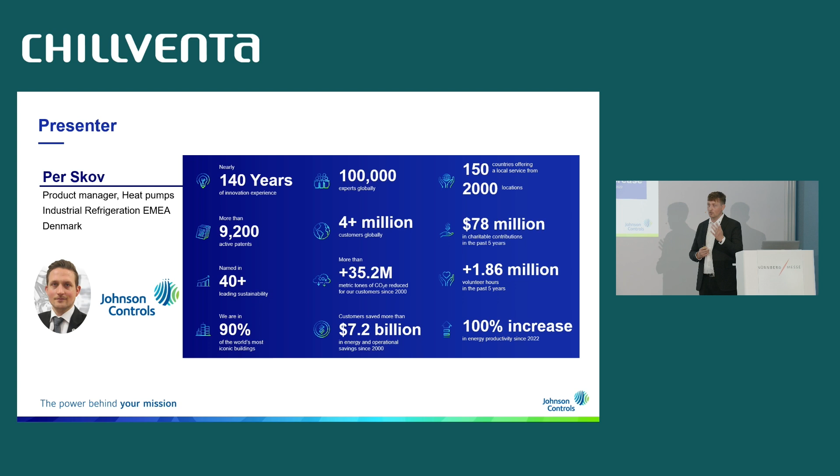What I'm going to talk about is high temperature heat pumps. To clarify from the beginning, when I say high temperature heat pump, I mean a heat pump supplying higher than 100 degrees. As we heard prior, there's different solutions for that. We're going to cover that in this presentation, but also a really relevant topic: the point of high source temperature.

We see a lot of the projects we have sold with high temperature heat pumps are actually being realized due to the fact that they utilize a high source temperature available in the process, which makes the solution far more competitive.

Some of the market trends, just to start out, quickly also addressed in the prior presentation: electrification, cleaning up the energy we use, increasing efficiency, and turning energy into smart systems. Heat pumps actually feed into all of these.

Starting with the first one, the big one, electrification, which has been stated to be critical for us to reach our target of CO2 emission reductions. In general, electrification covers replacing technologies or processes that require fossil fuels with electrical solutions instead.

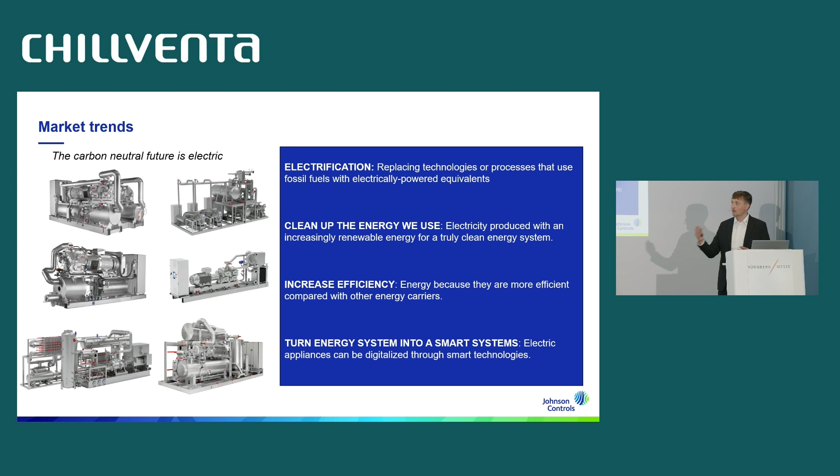This could be both car to electrical car, but for this case also fossil fuel boilers replaced by heat pumps or electrical driven boilers. But with regards to electrical boilers and heat pumps, it's important to look at the increase of efficiency. Heat pumps have the COP factor, so significantly higher efficiency than an electrical boiler, and thereby, with many operating hours, they are superior on the total cost of ownership.

Moving into that and talking also about excess heat — I like to talk a lot about excess heat because it's fantastic together with heat pumps. I like to state it's the world's largest untapped source of energy. Of course, putting in a question mark because I cannot qualify it, but we do have waste heat available everywhere.

The matter of fact is that in Europe, we actually have more waste heat available than we have heating demand for buildings. The difficult part is often that the waste heat is available either at a different temperature or a different location than the actual heating demand, but that's where heat pumps fit in perfectly.

Here's a similar example as we just saw in the prior presentation. At the top, this is a fossil fuel driven process. To the left, we have 110% input to account for a boiler efficiency of 90%, and then we get 100% process heat. For this example, we have 100% waste heat then from the process.

One could argue that many processes are optimized to lower the waste heat, but for the comparison here we use 100% waste heat. Then if we look at a heat pump driven process below, we recapture some of the waste heat — for this case 75% — that's put into the evaporator of the heat pump, kept inside the system. By doing that, we can significantly lower the energy input into the system, from 110% down to 25%, thereby lowering the overall energy consumption.

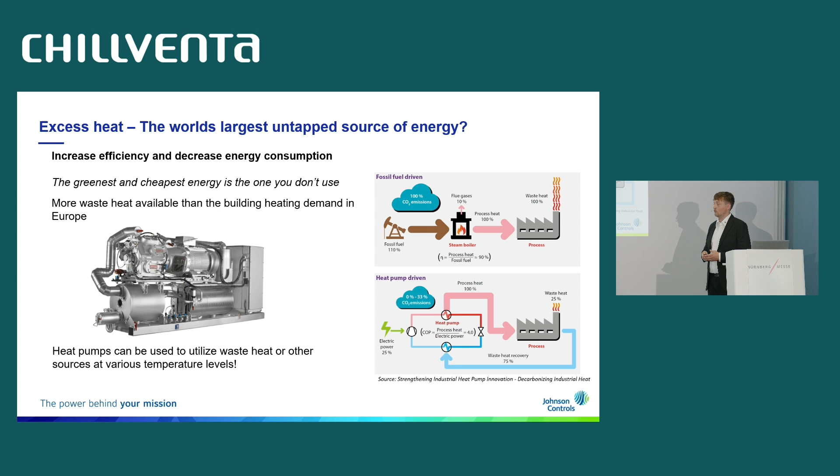So in general, heat pumps can utilize waste heat available at many different temperatures and boost it to higher temperatures that can be utilized both inside an internal process or for district heating.

To go one step further, I made this mapping with different industries, examples of processes, and approximate temperature range. To the left, we have excess heat. To the right, we have heat demand. And for nearly every process, there is excess heat, heat loss, or waste heat — many names. If we look at the industries, we have breweries, dairies, paper, bricks, starch, chemicals, sugar, and various different processes.

The approximate temperature range mapped out here ranges all the way from 20 degrees up to 120 degrees. A lot of these processes are being utilized already, especially in the brewery and dairy sector. We supply a lot of ammonia heat pumps for this, also because the heat demand in general is in the lower range compared to some of the other processes.

But then if we look further down on both brewery and dairy, but also other industries, there is a significantly higher temperature requirement in those processes. The interesting part is that these in general have higher waste heat available too. So if you look at the temperature lift across these, it's actually fairly similar across the process. Of course, this is where heat pumps fit in perfectly.

They can utilize this source or waste heat temperature that's available and then supply the high temperature. So of course, one important thing is to be able to supply the high temperature. The other important part is to be capable of utilizing the high source temperature. And that's a problem we have addressed with this new product, where we can utilize sources all the way up to 90 degrees.

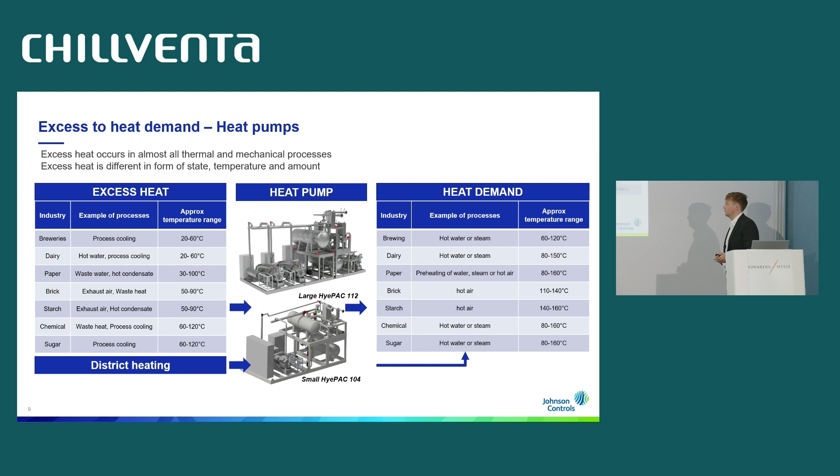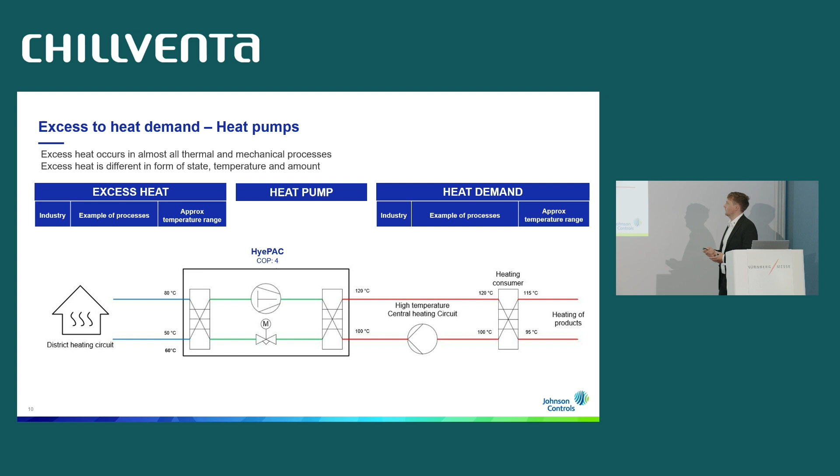It could also be turned the opposite way around. If there's no excess heat available, you could also use the district heating as a source for the heat pump and then supply into the process itself. So as a general example, district heating in at 80 degrees, out in the range of 50 to 60 degrees, and then supplying heating from 100 to 120 degrees.

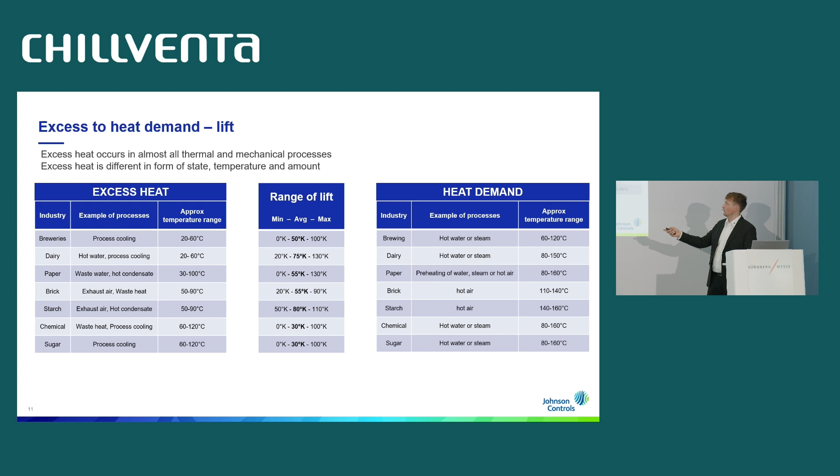The interesting part, as I mentioned, is of course the lift. My focus on lift is because in general it defines the COP that can be achieved, so the efficiency. If you look at the approximate temperature range for excess heat and heat demand, then we have an average temperature lift ranging from 30 degrees to approximately 80 degrees. The lower the lift, in general, the higher COP can be achieved by a heat pump.

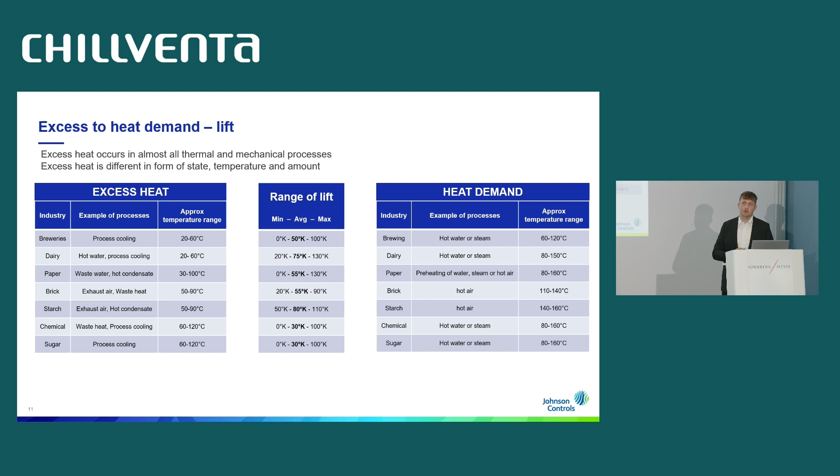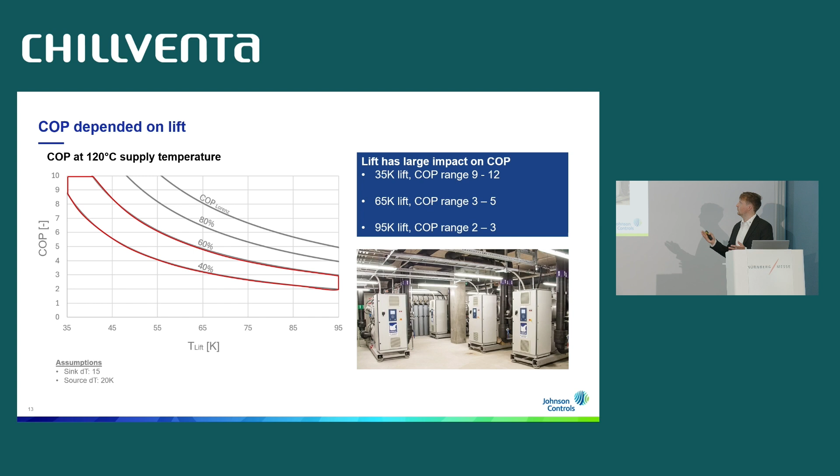So if we look at cases with 35 Kelvin lift, meaning utilizing a really, really high source temperature and having a smaller lift to get to 120, 130 supply temperature, we can actually have a COP in the range of 9 to 12 if we factor in the efficiency to have a realistic COP view. If the lift is then 65 Kelvin, then it's more in the range of 3 to 5. If it's 95 Kelvin lift, then it's in the range of 2 to 3.

So just to have an example of a case here, if we have cooling down from 60 to 45 degrees, which is something we've done in many cases in the industry, because that's where a lot of heat pumps can operate with regards to source temperature in the range of 40, 50, 55 degrees, and then supplying heating from 100 to 120 degrees, then the COP range would be in the range of 2.8 to 3.8.

If a source temperature that is available in most processes is utilized at a higher temperature, here cooling down from 90 to 75 degrees, then the COP range would be more like 5.5 to 6.5.

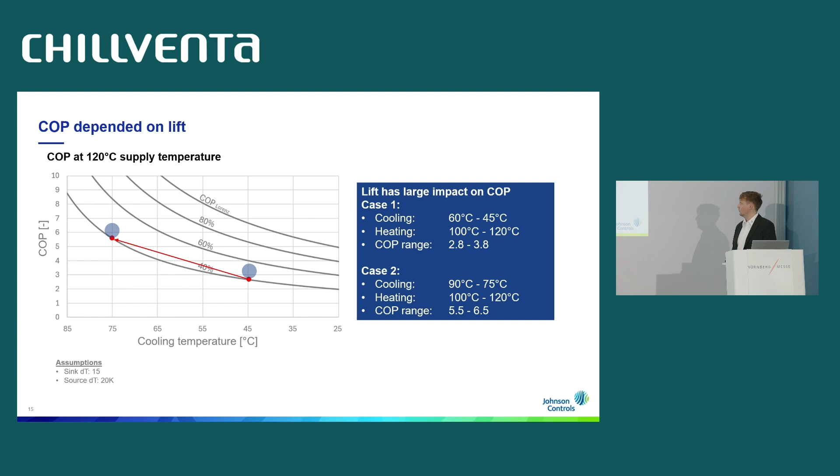And what impact does that have? In general, nearly doubling the COP, of course, halves the electricity consumption. Lower electricity consumption means lower cost to operate.

Other than that, higher source temperature is fantastic since the gas density going to the compressor in general increases, meaning that higher source temperature means we need smaller compressors or fewer compressors. That means increasing source temperature will lower the service cost as well. Also with regards to investment, fewer compressors, smaller compressors are cheaper.

So for this specific case, we can actually reduce the total cost of ownership by up to 55% now that we have a product available that can utilize these really, really high source temperatures.

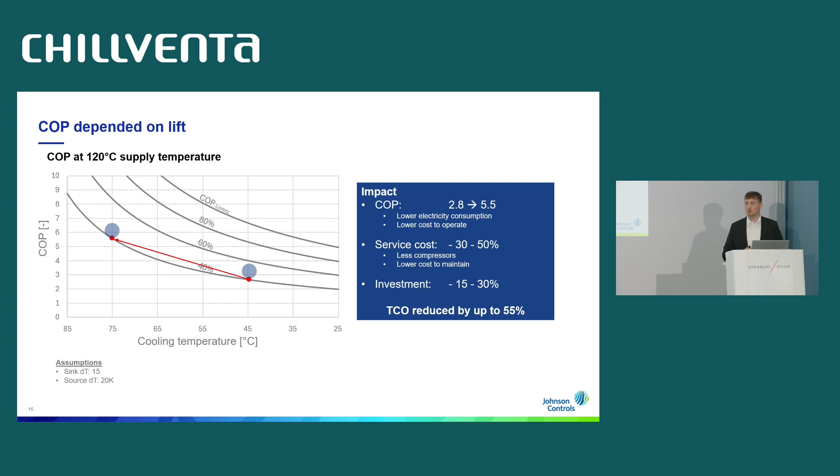And to back this up, we can actually also see that the last 3 projects for this have actually been with source temperatures in the range of 75 to 80 degrees, and all of them with COP above 6. The highest one with COP at 7.5.

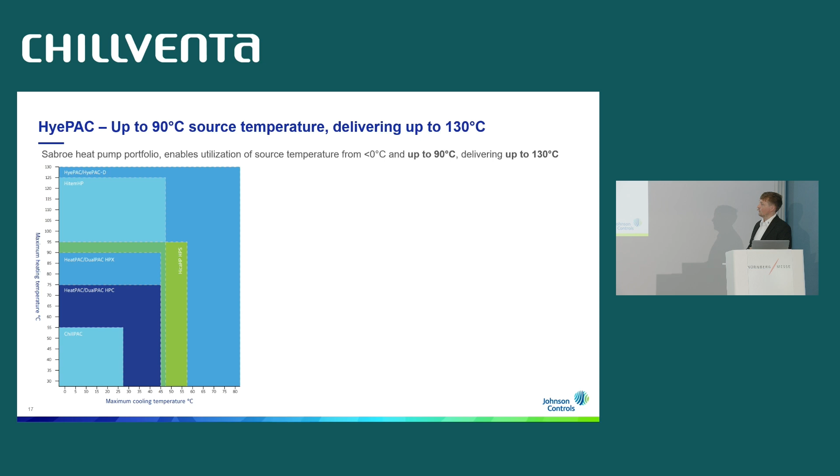So to look at the entire overview on how we cover both supply temperature and source temperature, we do have a lot of products here, actually both ammonia, we have also hydrocarbon here, and we have ammonia water mixture. So the overview you saw prior, we nearly cover the entire map with the offering from Sabroe. Hydrocarbon, ammonia water mixture, and pure ammonia. So now we can utilize sources all the way up to 90 degrees and we can supply temperatures up to 130 degrees.

If we start from the bottom, there's a product called ChillPAC, an ammonia chiller, often used for chilling or cooling purposes, but actually also used in some cases for heating purpose, or where the heat is reused, if it's for building, or in Denmark with low temperature district heating grid, it is also used to reclaim the heat as well.

Moving up one step further, we have HeatPAC and DualPAC HPC - single stage and 2-stage ammonia heat pumps. We have this product on display at our booth, feel free to come see it, it's a fantastic machine. These products can supply up to 75 degrees and utilize sources up to approximately 45 degrees, marked as the outlet temperature required to stay within the boundaries of the compressor. If you go one step further to HeatPAC and DualPAC HPX, it's the same platform but a different high stage compressor where we go up to 90 degrees with the same source temperature.

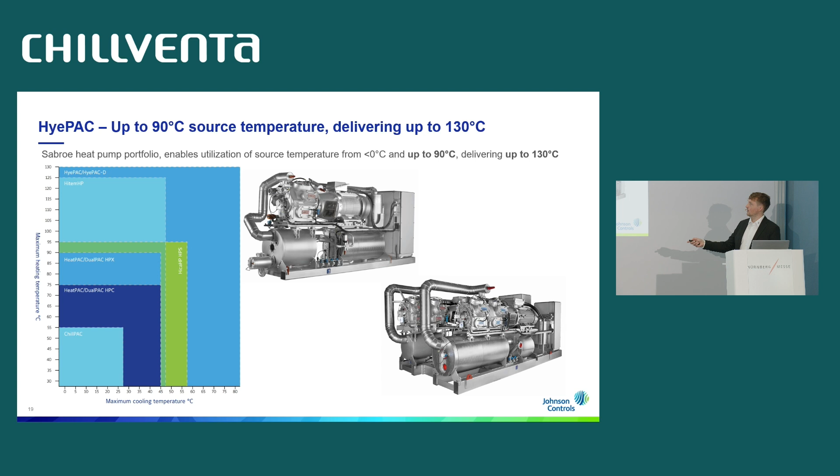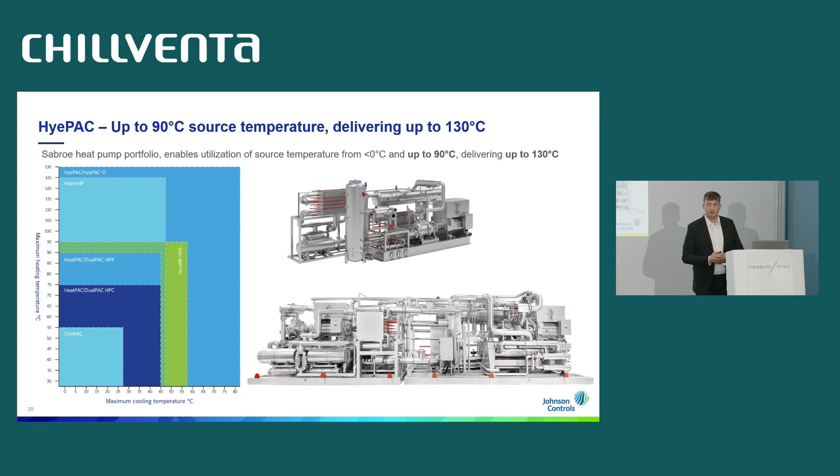The next product is the green part called HiCap, also available in 1-stage and 2-stage application. It is for high capacity heat pumps, in the range of 4 to 9 megawatts. With a screw compressor we can go even further up in source temperature, and we've seen a lot of projects linked to electrolyzers, big capacity available at high temperature that needs to be put into the district heating grid. If we go up one step further, HighTemps, hydrocarbon heat pumps, where we utilize source temperatures up to the range of 47 degrees and supplying temperatures up to 125 degrees.

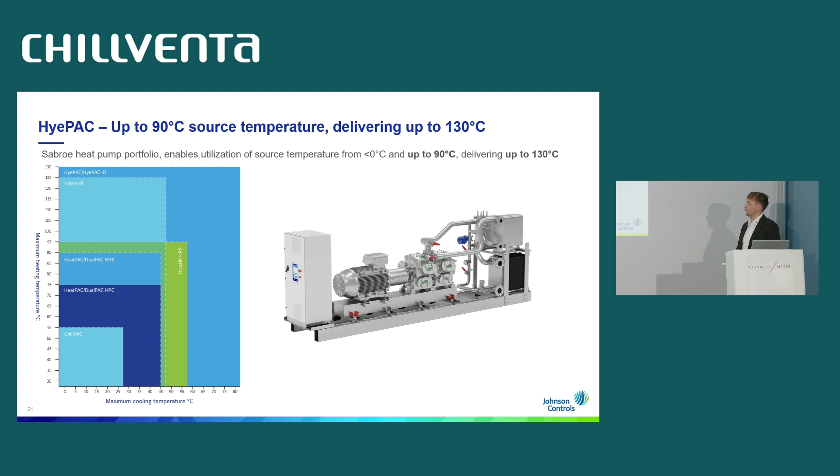And then the last one, a more complex system but really offers a unique solution to utilize high source temperature, called HyePAC. This is coming from the Norwegian company called Hybrid Energy, now part of Johnson Controls under the Sabroe brand. Here we can go up to 130 degrees and utilize source temperatures up to 90 degrees.

We have it similar to ammonia solution available as both 2-stage solution - this is the high stage compressor. We can do single or parallel compressors on low stage depending on the capacity need. This is the smallest one we have, a single stage solution with one compressor, then we can add more in parallel if there's a higher capacity demand.

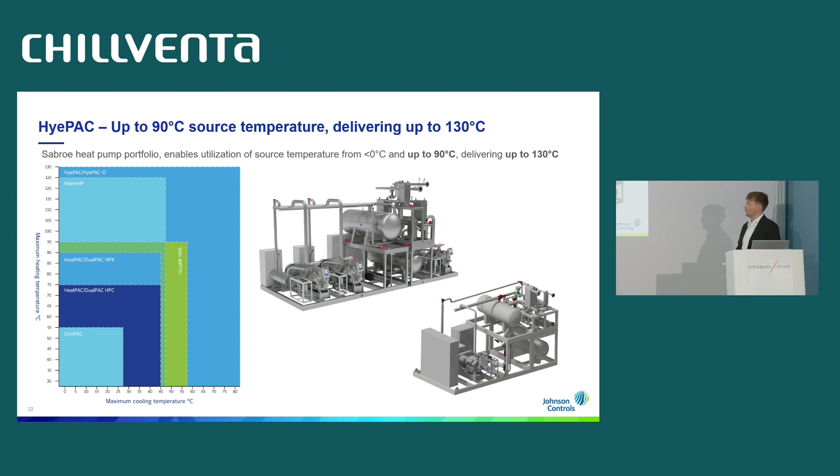Just to feed into this - when we started to support opportunities, there was a lot requesting higher temperature, but actually the first one we sold when they became part of the Sabroe family was only supplying around 92 degrees, something that could be covered with ammonia. The reason this was the winning solution was because the source temperature was so high, giving a much higher COP, and due to the many operating hours it was the superior solution in total cost of ownership. We see multiple projects like that in the pipeline, really capable of utilizing high source temperature.

So what is the technology, just at a glance? In general, it's a normal ammonia compression cycle mixed with an absorption cycle. We have an ammonia compressor, actually a chiller compressor, only operating at 22 bars, compressing the gas from a separator tank, and here it's mixed with the liquid from the separator tank. So gas goes to the compressor, liquid goes to the solution pump, which lifts it to the same pressure as the discharge pressure for the compressor.

They're being mixed, and then they run into the absorber or the condenser. Afterwards, to a high pressure receiver, through the expansion valve, into the evaporator desorber, back to the low pressure tank, where again ammonia and water are being separated.

So why can this utilize such high source temperature? Ammonia in general is high pressure at high temperature, water is low pressure at high temperature. Mixing the two, you get something in between. But the really unique part is that we can alter the mixture of ammonia and water, so we actually can create our own refrigerant dependent on the specific need.

We can also alter the refrigerant during operation by playing around with the level in our high pressure tank. So if we have a high source temperature, we add in a stronger water mixture, meaning more water into the mixture. It lowers the operating pressure, so we stay within the boundaries of the compressor. Also, since it's similar to an ammonia cycle, we don't need any superheat, so there's no really high source or suction temperature going to the compressor, as there would be with a hydrocarbon solution.